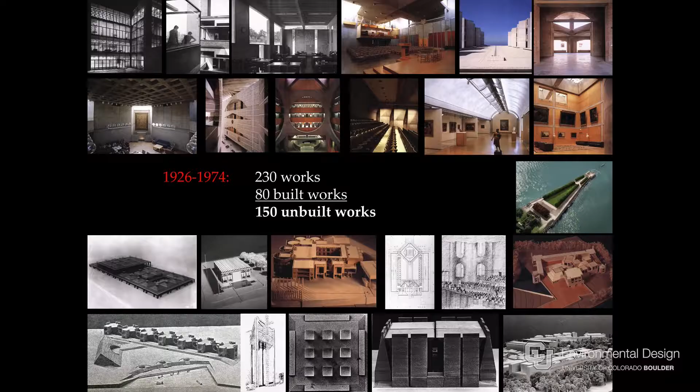Even so, the number of unrealized designs among Louis Kahn's total commissions is unusually high, 150 unbuilt projects out of 230 total designs. And the quality of the unbuilt work is simply staggering. I would maintain that if we were to leave aside Kahn's built works and evaluate only his unbuilt works, these would still constitute one of the most significant contributions to 20th century architecture.

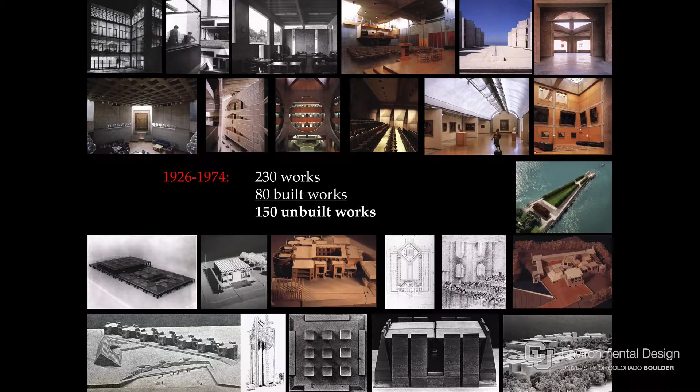As I was discussing with the students earlier today, architectural historians, critics, and practitioners have generally tended to ignore unbuilt designs by architects, being unwilling or unable to recognize either their theoretical insights, generative potential, or critical importance in an architect's development as a designer.

It is my contention that the loss of our disciplinary history that is represented by the failure of educators, practitioners, critics, and historians to study and learn from these transformative works, unrealized only by chance and circumstance, is intellectually and culturally unsustainable. The insights and constructive concepts embodied in unbuilt designs, such as Le Corbusier's Venice Hospital, must be re-engaged in the discipline of architecture.

As I mentioned in my comprehensive monograph on Kahn, I examined 12 major unbuilt works that I hold to be of equal importance as the 12 great built works that we all know. As becomes clear when examining Kahn's architectural designs in chronological order, it was almost invariably in these pivotal, but almost never studied, unbuilt projects that Kahn first evolved the fundamental ordering concepts that he would later use as the foundation for his famous and most often studied built works.

For Kahn, these unbuilt designs established the principles that would later characterize his built works, in the same way that the earliest archaic Greek temples are necessary for the realization of what we today consider the epitome of architecture of the period, the Parthenon. And about that, Kahn has to say, quote, "I do not believe that beauty can be deliberately created. Beauty evolves out of a will to be that has its first expression in the archaic. Compare Paestum to the Parthenon.

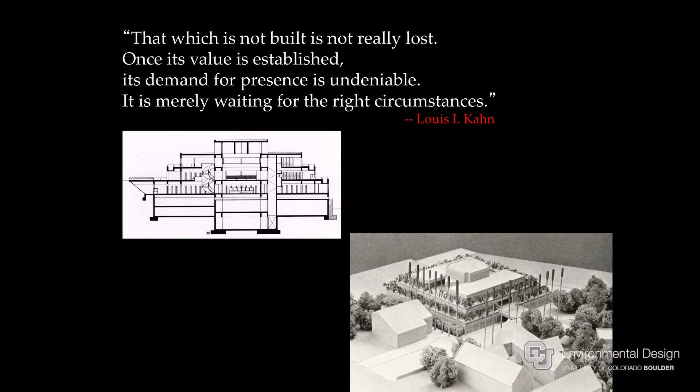In the brief presentation of these 12 designs, I'll indicate the ordering principles that Kahn discovered for each unrealized design, and where appropriate, point to his later built works where these ordering principles were in fact realized and engaged. We begin with the Jewish Community Center in Trenton, New Jersey of 1954 to 1958.

Kahn began the design of the main building by evolving a series of stacking and interlocking octagonal forms, even as the design of the bathhouse, which was the first to be built, developed as a cruciform plan of overlapping square volumes. In late 1955, Kahn presented the designs for the Trenton Jewish Community Center to two young faculty from the University of Texas, Austin: Colin Rowe, British architectural historian and critic trained by Rudolf Wittkower, and Robert Slutzky, American painter trained at Yale by Josef Albers.

These two young faculty told Kahn that it seemed he was trying to grow the building as an organic entity. And they suggested that, based on the overlapping grid of the bathhouse, Kahn should rather look at the plans of Andrea Palladio and what Kahn later called the bay system of room making.

And Kahn went on to develop the definitive scheme for the main building based on a tartan, or a small, large, small bay system that you can see on the left, with 10-foot square column clusters that house the service spaces surrounding 20-foot square primary functional spaces. And this can be understood as the first articulation of one of Kahn's most important concepts, which was the idea of servant and served space.

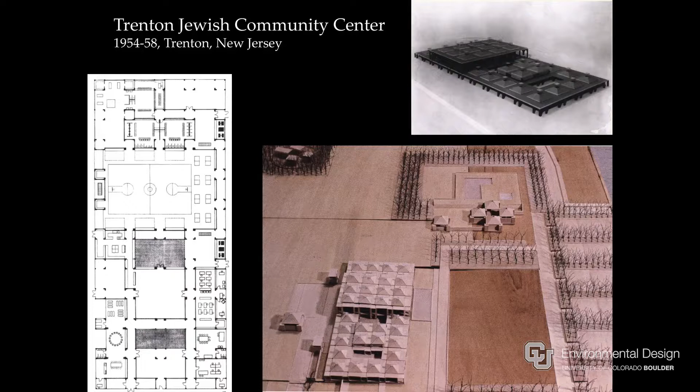By the way, the model on the lower right was made by graduate students at the University of Florida. I give these unbuilt projects by Kahn and Le Corbusier and others as studio projects, to assume they're built and then to make additions to them, as a way of studying them and treating them as possibly having been real.

In the bathhouse, the four hollow columns at the corners held the services and entries and were the first clear example of this conception of servant and served. In 1953, Kahn had anticipated the implications of this little bathhouse design when he said, "In Gothic times, architects built with solid stones. Now we build with hollow stones."

The community center and bathhouse's powerful definition of the space, of our experience of it, by the roof and the ceiling overhead, as Colin Rowe noted in his 1957 essay, Neoclassicism and Modern Architecture, went directly against the dominant definition of the free plan space of the modern movement, determined as it was by the flat slab and the column grid. Rowe noted that in his design, Kahn presents the most definitive solution to date for the desire to reintroduce overhead spatial structure, with spatial cells, structural bays, and horizontal structural system and rhythm, into modern architecture.

This intention of Kahn's, which would characterize all his subsequent designs, originated in the 1,760 up-view section axonometric diagrams of Auguste Choisy's Histoire de l'Architecture of 1899, the textbook that Kahn studied as a student and kept in his library and used in the office throughout his life. These drawings present architecture from throughout history as being focused on the formation of interior space through the fusing of the walls and the ceiling, the overhead surface as it generates the plan at the ground.

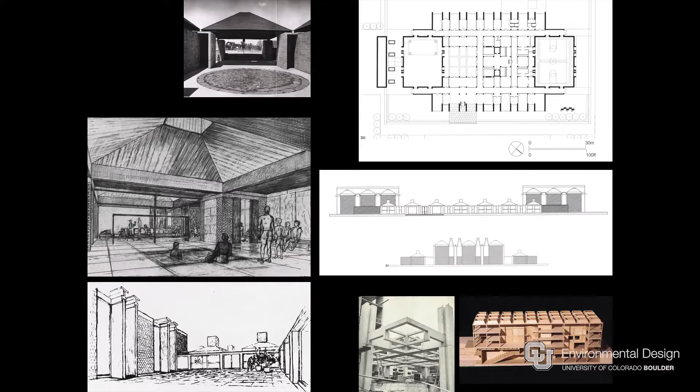Late in life, Kahn returned to this early concept of a field of pyramidal top-lit domes of the Trenton project in his design for the upper floor of the Yale Center for British Art of 1969 to 74, which was the last project that Kahn saw built. I mentioned this project to the students earlier today.

In the design for the United States Embassy in Angola of 1959 to 62, Kahn began with his observation regarding the way in which the inhabitants of the city of Luanda dealt with the intensely bright and hot sunlight. He noted that the residents turned away from the glare of the direct sunlight coming through the windows and worked with the indirect light that was bounced off the walls.

He also recognized the environmental intelligence of the traditional Angolan construction system that provided a ventilated space between the upper level top roof and the second rain roof, so as to allow the heat from the sunlight striking the roof to be exhausted and not taken into the interior of the building.

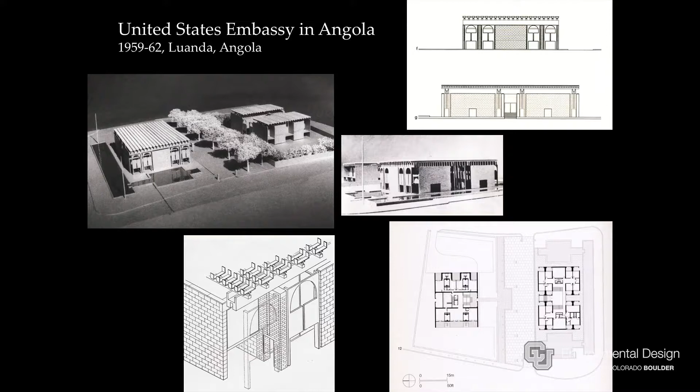Kahn's design for the embassy and residence for the ambassador involved a system of double layers of protection from the heat and the glare of the sun. A double roof of sunroof above rain roof, and double walls of precast concrete sun shields, he called them, surrounding glazed volumes within. These are Kent Larson's digital reconstructions, which I'll be using off and on throughout.

The porous tree-like shade canopy of the roof, constructed of bands of clay tile leaves, as he called them, with a narrow slot between, would have characterized the experience of the half of the interior volume that was actually open to the roof and open air in that case, with the diffused light punctured by thin lines of direct light only at noon.

Even more porous sun shield walls, articulated by semicircular openings at their top, stand 10 feet in front of the full-height glazed walls of the surrounding and enclosed spaces, through which the inhabitants would have been able to see both framed views of the landscape, as you can see in some of these reconstructions, as well as the play of light and shadow in the light court itself.

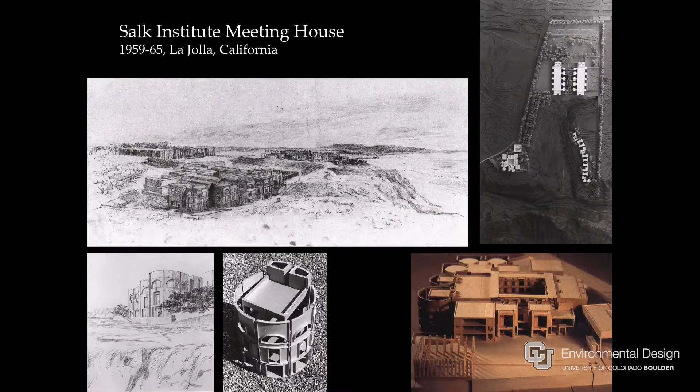The plan of the meeting house presents yet another new discovery for Kahn, the conception of a plan as an assembly of independent, self-structured volumes or buildings, rather loosely gathered around a square courtyard in this case. With its square regular center and irregular outer edge, the plan represents a new way of composing spaces for Kahn, one that allowed individual rooms to be read clearly while also establishing a sense of interior spatial structure ordered by the central courtyard.

A second conceptual discovery in this design is the way the independent room buildings are joined together with an extensive set of spaces for circulation and informal meeting, what Kahn called the architecture of connection, which is equal in dimension to the enclosed primary volumes. And that becomes a fairly typical thing for almost all of Kahn's later buildings.

Both these insights into plan making were at least partly inspired by the full-size imaginary reconstruction of the Campus Martius section of ancient Rome, the center of ancient Rome, made by Giambattista Piranesi in 1762, which Kahn hung on the wall of his personal office in Philadelphia, directly across from his desk.

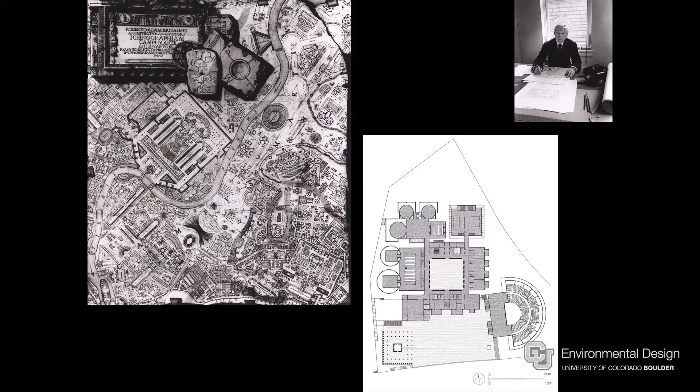So if you see Kahn at his desk, the photographer that took the photograph has his or her back to this Campus Martius full size, which is about the size you see on the screen actually. Piranesi's plan, which is composed of an endlessly varied set of clusters and assemblies of pure geometric forms, filled Kahn's field of vision whenever he looked up from his own drawings.

At the edge of the meeting house overlooking the Pacific Ocean, Kahn placed a series of cylindrical concrete sun shields housing cubic, full-height glazed reading rooms for the library, as well as a series of rectangular concrete sun shields housing cylindrical, full-height glazed dining rooms. The inner glazed rooms were to be given wooden shutters for control of the microclimate, and the outer sun shield walls were to be built of cast-in-place concrete with travertine stone insets, denoting the honorific status of these rooms.

From the courtyard open to the sky and centering in the building exactly like the Renaissance Palazzo, to the cylindrical glazed dining rooms that are set within their square outer shell walls, of which Kahn said there is no better seminar room than a dining room. The meeting house was organized to allow the scientists to engage larger issues outside of their laboratories. As Kahn said, quote, essentially Salk Institute is a laboratory building, but you must not forget that that place of meeting is of utmost importance.

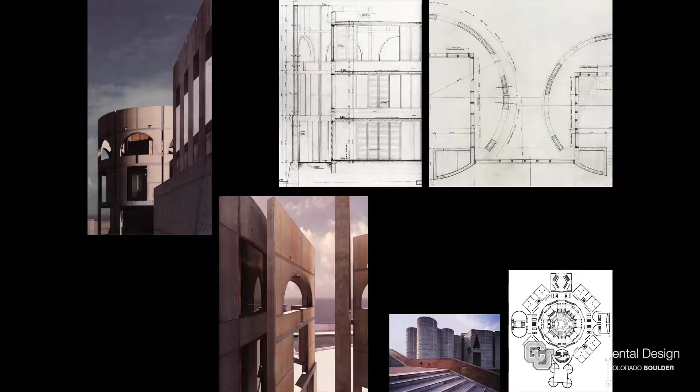The ordering of independent room buildings around a central honorifically dominant primary volume to form a regular center and irregular outer edge, the joining together of these independent volumes with the architecture of connections, and the concept of freestanding cast concrete sun shields forming shaded spaces, protecting glazed apertures within. All these concepts were developed for the meeting house and would later be realized in Kahn's assembly building of the Bangladesh National Capital at Dhaka of 1962-74, the lower right corner.

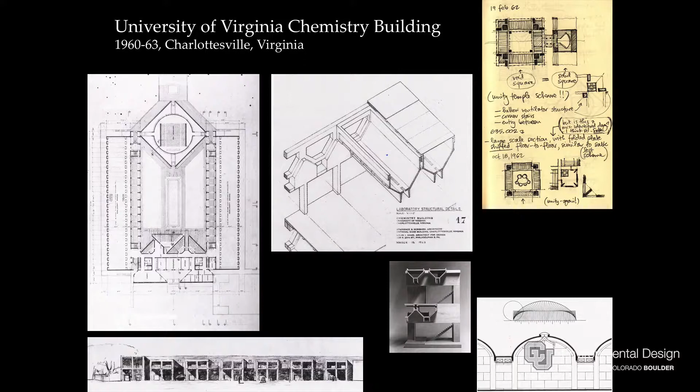This elegant folded plate structure, which was fully worked out for the Salk laboratories by Komendant, was abandoned after the decision was made to not build a meeting house. Kahn said he felt a terrible sense of loss when they could not employ this structural design at Salk, and he continued to endeavor to deploy it on subsequent projects, including the chemistry building. And it would ultimately evolve into the curved gull-wing-shaped cast concrete roof shell structure of the Kimbell Museum of 1966 to 72, the diagram on the lower right, where the initial idea of bringing light in at the center of the vault would also be realized.

Kahn's unbuilt designs for the Mikveh Israel Synagogue, intended to be built in his hometown of Philadelphia from 1961 to 72, which, according to his daughter Sue-Ann Kahn, was the project that hurt him the most in not getting built.

On the inner walls of the cylindrical light chambers, Kahn designed a series of arched openings with curves at the top and bottom, reversed arches that suggest the non-structural nature of those arches as well—the erosion of the concrete shells by light and the arc of the sun as it crosses the sky.

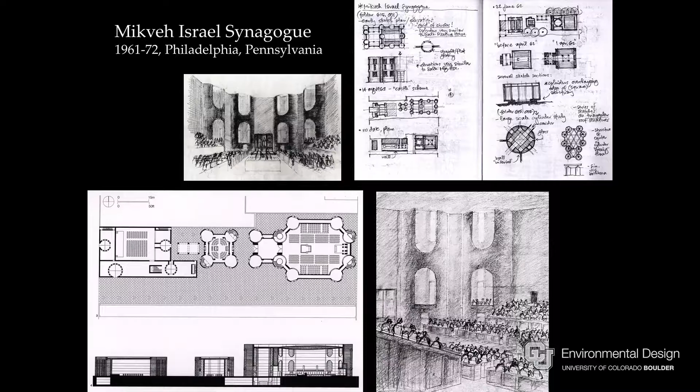The ceiling roof of Kahn's design proposed a structure that was elliptical in both plan and section, an internal hidden truss with top and bottom faces of cast concrete, very similar to Le Corbusier's Ronchamp Chapel, which Kahn had first visited in 1959. Contrary to almost all other religious structures, the ceiling comes down into the sacred space, catching the light from the cylindrical light chambers to the side, as you can see in Kent's reconstruction.

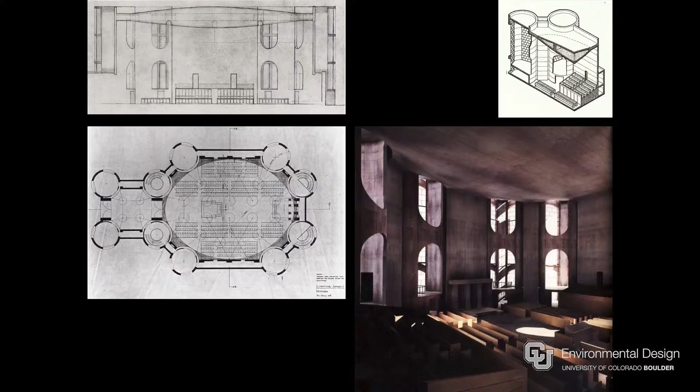These cylindrical light chambers are perhaps the best example of what Kahn called light-giving walls. Inside the synagogue, inhabitants would have had no eye-level views out, and sunlight would have been indirect and bounced off the curved walls, seeming to come from all sides, so that solar orientation would become confused. In this space, the inhabitants would be detached from their surroundings, distanced from the outside world, floating in a sea of light.

This is the image that was on the poster, I think.

Noguchi introduced Kahn to the use of plasticine clay, which Kahn immediately adopted for his site models. As a result, all of Kahn's later projects show a dramatically increased emphasis on the initial marking of the ground, on making an anchored base or plinth for the building, and on the engagement of the earth as the first act of construction.

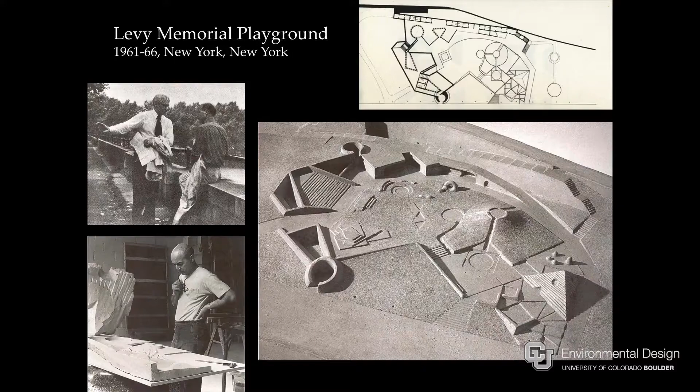In summarizing their six often frustrating years of collaborative work, when they were repeatedly blocked from realizing their designs by Robert Moses, the park and highway planner of the city, Kahn said: 'I did not speak in terms of architecture. He, Noguchi, did not speak in terms of sculpture. Both of us felt the building as a contour, not one contour, but an interplay of contours, so folding and harboring as to make, by such a desire, no claim to architecture, no claim to sculpture.'

These projects are waiting for the right circumstance. It's my understanding that Jonas Salk's son is currently fundraising to build this in New York in Riverside Park.

The Interama, Inter-American Community, designed in 1963 to 69 for Miami, Florida, was part of a large exposition site involving buildings by many of the leading architects in the US. I.M. Pei and Marcel Breuer were quite close by Kahn's project.

Kahn's proposal was for a powerful series of independent building volumes that framed a triangular plaza with views across the bay to downtown Miami. A line of what he called houses of nations, whose Y-shaped plans housed naturally ventilated exhibition and cultural spaces, marched along the western side of the site, forming small courtyards at the water's edge.

The main building at the southern end of the site, with the central sunken court and pinwheeling stairs, employed servant and served spaces in both plan and section, shown upper right.

Of particular note are the X-shaped structural beams that you can see in the section that encircle the top of the main space, which in addition to carrying the roof and housing ventilation ducts, also act to bounce the sunlight into the central room.

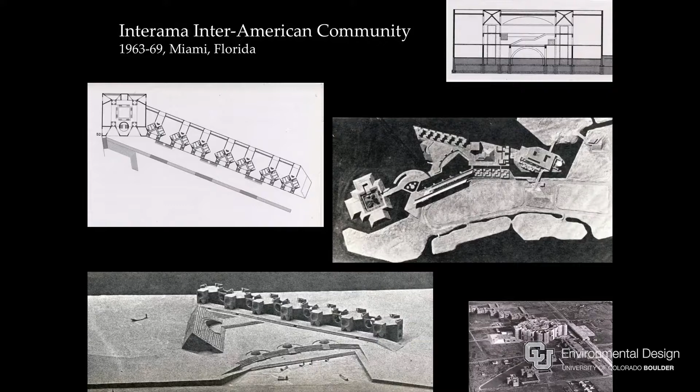The Dominican Motherhouse was designed for Media, Pennsylvania in 1965 to 69, and is a recomposition and transformation of both the traditional program and building type of the convent.

As can be seen in the Salk Institute and the Indian Institute of Management, Kahn believed that the monastic plan was an appropriate type for use in housing many other programs. But this was his first chance to design an actual monastic enclave.

In an early drawing, shown lower right, after developing his typical series of independent room buildings, Kahn took the logical next step in this way of making plans, which was to cut them apart with scissors so as to be able to freely rearrange them as a collage.

The resulting plan has a regular outer edge formed by the walls of the cells of the sisters, as you can see in the upper right, and an irregular center where Kahn has placed the common rooms such as chapel, refectory, library, and schoolrooms in what would, in a traditional convent, have been the open courtyard.

The result is a reversal of his own plan for the Salk Institute Meeting House with its irregular outer edge and regular center. It is also an inversion of the traditional plan of the monastic type.

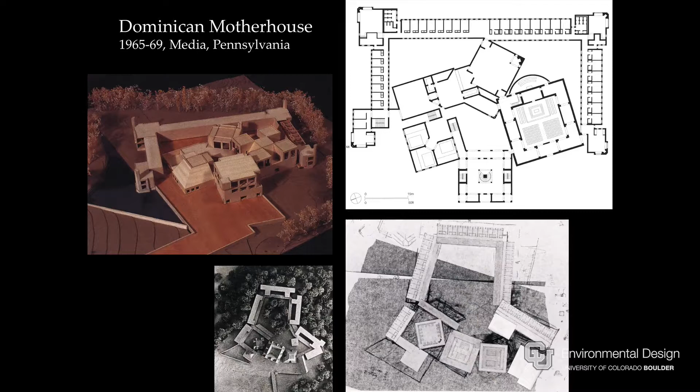Kahn proposed the Dominican Motherhouse to be built with masonry bearing wall construction using flat jack arches over the windows and door openings.

These are redrawn elevations done by my students, with openings becoming larger and piers becoming smaller as it rises, to reflect the diminishment of the structural loads.

This method of constructing statically hierarchical load-bearing walls that represent the diminishment or increase of their load would be realized in Kahn's design for Exeter Library, lower right, of 1965 to 72, while the conception of a plan as a collision of independent pure volumes would be realized in Kahn's Fisher House of 1967, the photo next to it on lower right.

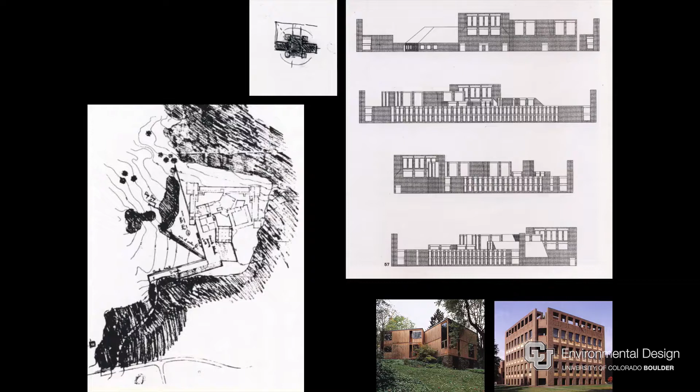The Kansas City office tower of 1966 to 74 was one of Kahn's very few attempts to come to terms with the dominant building type of his time, the high-rise office tower.

Kahn felt that typical steel frame high-rise construction was not substantial enough, calling the buildings of Mies van der Rohe and SOM tin can construction.

For Kansas City, Kahn and Komendant proposed to build a 24-story tower using slip-form concrete construction, which would have been less expensive and required less time to build than steel construction.

Four corner double columns would have supported a post-tensioned truss structure at the roof, and the building would have been constructed from the top down with reusable formwork slipping down, as you see in Kahn's drawing of the actual construction process.

Of particular note was Kahn's provision of smaller scale spaces at the street edges to mitigate the large scale of the tower in the city.

In 1974, SOM convinced the client to give them the project. Kahn, who was not informed of this decision for some time, continued to work on the design.

For Kahn, this episode exemplified, as he told Stanley Tigerman, the last person to see him alive, in London, what is wrong with our profession: no ethics. And he was a close personal friend of Nat Owings.

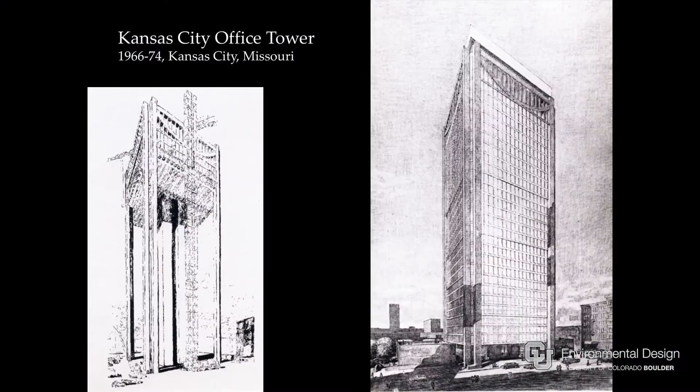Kahn's sketch for the drawing of the top of the Kansas City office tower, at the lower right, showing people on the rooftop terrace above the curving catenary roof truss, was transferred to his later Palazzo dei Congressi project, which we'll see in a minute.

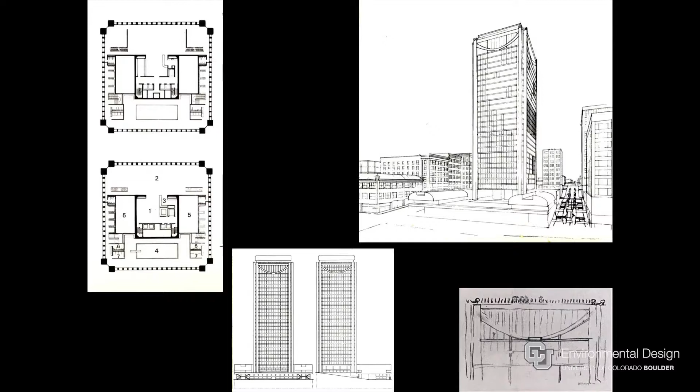His concept of building a tower from the top down and hanging the floors of an office building would inspire a number of other architects, to name only one, the design of Norman Foster for the Hong Kong-Shanghai Bank.

The memorial to 6 million Jewish martyrs, to be built in New York at the tip of the island, 1966 to 72, in the original Battery Park, proposed a series of glass cubes 10 feet on a side, which would transmit light while also casting light-filled shadows. Kahn intended to build a memorial using a woven structure of 6-inch by 6-inch by 6-foot long cast glass blocks,

Which would have been cloudy and finished with a non-reflective surface. So the plexiglass that he used to make the models is quite accurate in that sense. The glass blocks would have been assembled without mortar, using interlocking pin and hole jointing, like the marble sections of a column of a Greek temple.

In describing the quality of light he intended for the project, Kahn described the experience of the Pantheon in Rome. Quote, "The light is so strong as to feel its cut." End quote. In this, Kahn seemed to suggest that he conceived of the cast glass as a frozen or solidified light, which had been cut and shaped into masonry blocks. The whole design is a monument to light, massive, thick, translucent light.

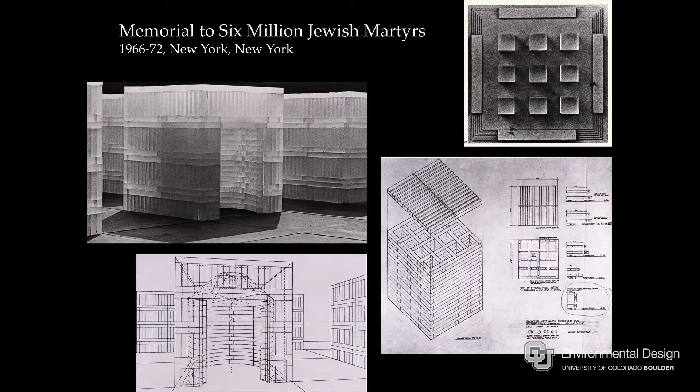One of Kahn's greatest unrealized projects is the design for the Hurva Synagogue, proposed to be built in Jerusalem and worked on from 1967 to 74, 74 being the year of his death. Sited on the hill opposite the Temple Mount, Kahn carefully kept the height of the building no more than the two great religious sites of Islam, the Dome of the Rock, and of Christianity, the Church of the Holy Sepulchre, which stand atop the Temple Mount.

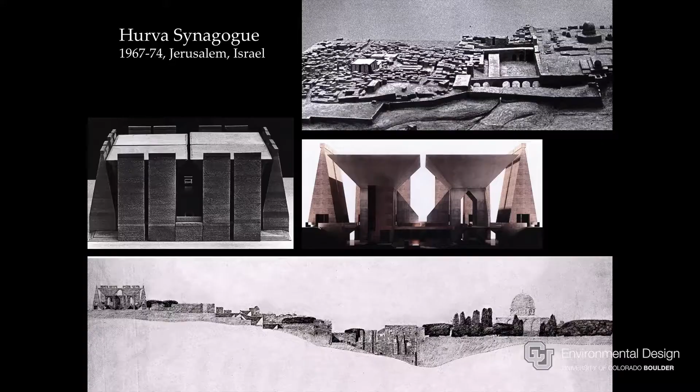Kahn painstakingly made a large site plan, site section, and clay model of the entire central section of ancient Jerusalem to assure his design was appropriate to the larger context. The design is remarkably introverted.

The outer wall is composed of 16 massive pylons made of Jerusalem stone, the same stones that are used to build the western wall of the Temple Mount, off of which the sunlight would have bounced to enter the sanctuary within, giving it a golden glow. One would have entered the synagogue at the corners between these battered pylons, remarkably similar to those on Egyptian temples, and these pylons housed small chapels at their bases, small so-called candle chapels.

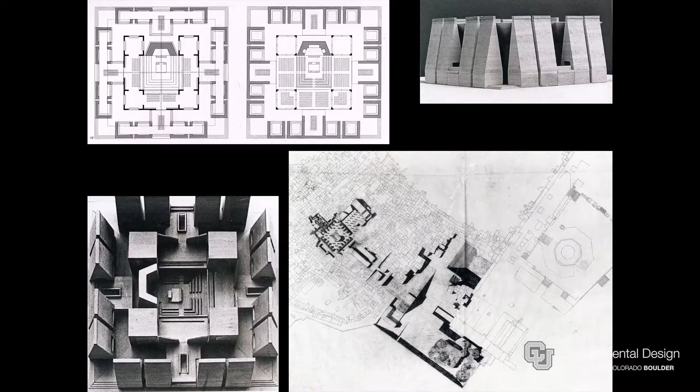Inside, 4 massive concrete umbrella-like roof structures, hollow, lightless, and dark, define but do not enclose the space of the sanctuary, its square and cruciform plan. The 4 umbrella-like roof structures would not have touched, and light would have entered the sanctuary through the thin slots between the edges of the beveled concrete and the roof shells.

It's pretty compelling. The structure joins modern reinforced hollow concrete construction to ancient battered wall masonry mass and brings to mind Kahn's debt to Le Corbusier and the remarkably prescient statement that Kahn wrote in 1965, shortly before he learned of Le Corbusier's death that same year, which is as much about Kahn's own architecture, I would argue, as about anything Le Corbusier might design.

Quote, "The stark architectural directness of the castle and the musically rhythmic image of the Greek temple combines in my mind a thought about Le Corbusier. I believe Le Corbusier, even in light of his marvelous revelations in architecture, is just beginning to make his greatest work. I dare to think of a building he might make, a great block of a building, which is cut into from top to bottom in varied places of varied shapes, neither forgetting the castle nor the order of the temple, giving light to spaces and passages on the immediate interior and leading to a glorious central and single space, the walls and their light left in faceted planes, the shapes the record of their making, intermingled with the serenity of light from above," end quote.

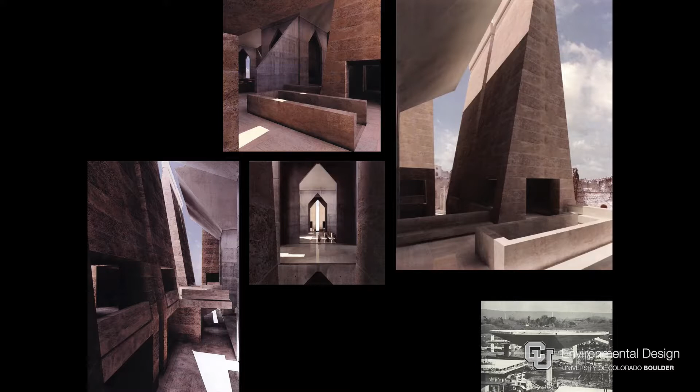I have to say, there are few statements by one architect of another architect's work of that kind of poetic power. At the time of Kahn's death in 1974, Jerusalem Mayor Teddy Kollek had just written to Kahn of his eagerness to start the building of the Hurva Synagogue.

The concept of the umbrella-like concrete roof shells, an idea that Kahn had been interested in since he visited Wright's Johnson Wax Building in 1959, which was built in 1936, but which he only visited in '59, were realized in a very different form in the Olivetti Underwood factory, lower right, of 1966 to 70, on which the young Italian architect Renzo Piano worked with Kahn. Piano, at the time I wrote this, was designing the addition to the Kimbell Museum, which is another discussion altogether.

The Palazzo dei Congressi, designed for Venice, Italy, in 1968 to 74, began with Kahn's clay site model of the city of Venice, upper right, with only 3 monuments that are clearly legible: the Piazza San Marco, Le Corbusier's Venice Hospital, which at that time was still intended to be built and was under development by his partners, and Kahn's Palazzo dei Congressi on the original site he was offered, the Biennale Giardini site, where the biennales are held. In the heavily treed Giardini site, Kahn proposed an elevated Congress Hall and an artist's workshop on the ground. Plan on the lower right.

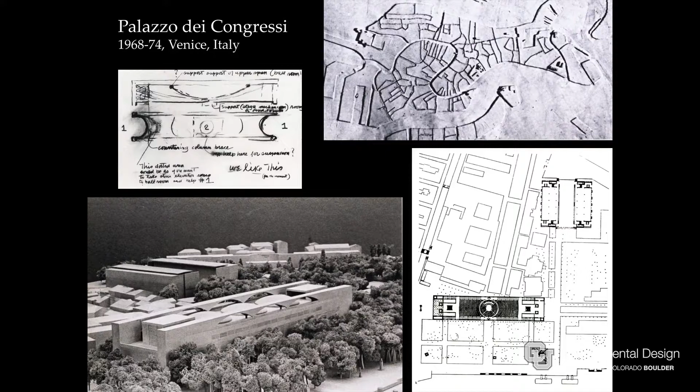The curving floor of the elevated Congress Hall was inspired by Kahn's studies in 1950 of the bowl-shaped Campo in Siena, as well as suggesting a large bridge hanging down rather than rising up as those in Venice. The floor structure of the Congress Hall was to be a post-tensioned cast concrete slab in the form of a catenary curve, almost exactly as he first proposed in his sketches for the top of the Kansas City office tower.

Italy being Italy, the Biennale Giardini site proposed by the city was then rejected by the city. And the city asked Kahn to redesign the Palazzo dei Congressi for a site in the city-owned Arsenale, at that point not being used by the Biennale as it is now, the former shipbuilding precinct of the Venetian Empire. Here Kahn was able to propose that the Palazzo dei Congressi span across the canal, giving the conception of the suspended Congress Hall a much clearer rationale.

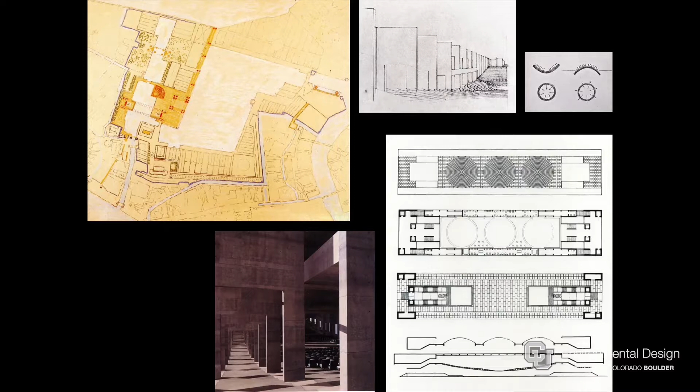On the roof of the building, above the 3 smaller domes, Kahn proposed an elevated garden and a viewing terrace. Together, the interior of the Congress Hall, understood as a kind of piazza bridge, and the roof terrace engaged Kahn's friend Aldo van Eyck's insight, in that little diagram in the upper right, that when people occupy hilltops, they face outwards to the distant view, as on the top of the building. And when they occupy valleys, such as the curving Congress Hall, they face inwards towards each other and are gathered together into the space.

During the time Kahn worked on the Palazzo dei Congressi, he was invited to give a lecture on the roof of the Doge's palace. We should all be so lucky. There he was able to observe at close hand the lead roofing of San Marco Basilica. Noting that this roof had lasted 1,000 years on these curving forms, Kahn said he felt it was certainly appropriate for use in a contemporary building. And based on his notes as to the sheet sizes and installation methods, Kahn used the same material and methods of installation on the curving roof of his Kimbell Museum, lead-coated copper in this case.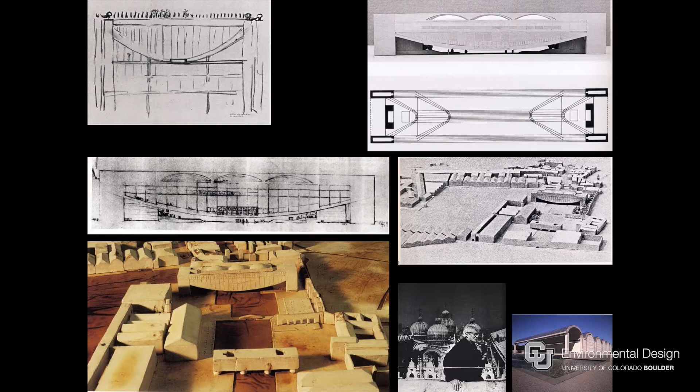The Palazzo dei Congressi was also the first late design where Kahn proposed, rather than deeply recessing the glazing, a flush glazed facade and stainless steel skin, both of which he would later employ on the Yale Center for British Art.

Okay. The design for the Graduate Theological Union Library in Berkeley, California of 1971 to 74 was intended to house, and in fact today does house, the world's largest collection of books on religion. In many ways it is a return to Kahn's 1956 unsuccessful competition design for the Washington University Library, which was a pyramid of books proposed at Washington University as glass, but here proposed in concrete, a pyramid for books, but in this case also housing an Exeter library-like central vertical space that you can see in the section.

Kahn proposed here for the first time that the apertures of the building would be shaded by rows of trees, what he called a green filter, that incorporates a garden into the building fabric. This late design had only reached a very preliminary stage when Kahn died, and the building was later realized in a significantly modified form, photo in the lower left, by local architects from 1977 to 87.

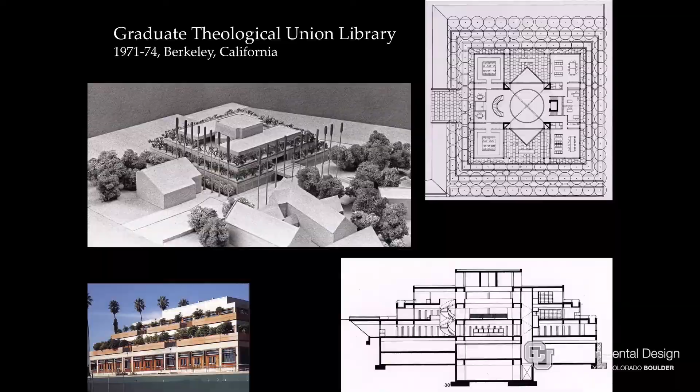While the resulting building follows Kahn's design in general massing, almost none of his specific ideas from the preliminary design were actually employed. The result may best be described as a bit of a caricature of Kahn's design. While in my monograph on Kahn, published in 2005, I said the library, even in its modified form, should be considered Kahn's last built work, having recently revisited the building, I have now come to the opposite conclusion and feel it's best that Kahn's unbuilt designs remain so, unless they can be realized as closely as possible to how he left them.

Which brings me to the last project. The Franklin Delano Roosevelt Memorial, proposed for the southern point of Roosevelt Island in the East River of New York in 1973 and 74. His site is within view of the United Nations buildings, as you can see in his sketch. And this project represented a return to beginnings for Kahn, who had begun his career as a housing architect for Roosevelt's New Deal, designing more than 2,500 housing and government-sponsored apartments by the year 1945. As the client noted in hiring Kahn, quote, "Kahn loved Roosevelt and knew more about him than most of us."

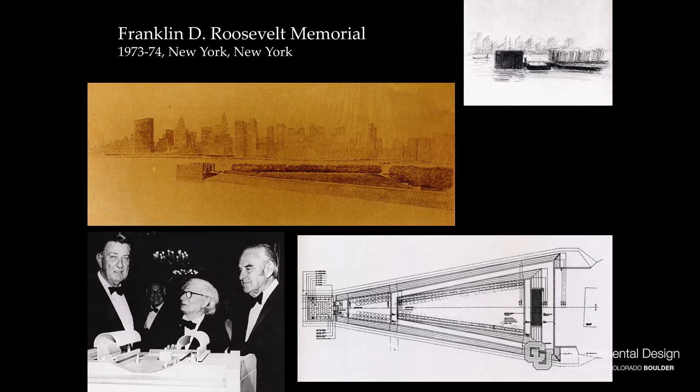Kahn's conception of this memorial came early and clearly, quote, "I had this thought that a memorial should be a room and a garden. The garden is somehow a personal nature, a personal kind of control of nature, a gathering together of nature, and the room is the beginning of architecture," end quote. The site is entered from the north end, where we would move through a long, downward sloping perspectival garden, appearing longer than it is in fact.

At the other end is a roofless room, set out into the river, made of massive stones opening to the south. Kahn proposed, actually, in his models, you can see them here, two statues of Roosevelt. A life-size standing figure we would encounter outside the stone room, and a larger than life-size figure of Roosevelt sitting in a wheelchair we would encounter upon entering the stone room on the inside and opposite side. The 60-foot square room is a truly archaic space with 12-foot tall walls that are 6 feet thick, made of solid granite blocks. The room is at once both monumental, scaled to the city, and intimate, scaled to the human figure standing at the center of the river.

So I end the lecture with three endings. The first is the last words in my book, written in 2003, published 2005, on Kahn. After Kahn's death in 1974, the Roosevelt Memorial design, like all of Kahn's unbuilt projects, was abandoned. Recent events, however, hold out some hope that perhaps this extraordinary design of Kahn's may yet be built. Second ending, written in 2009. Yet Kahn's design of the room and the garden was completed through construction documents, ready to be built, and fundraising efforts continued for more than a decade. In the 1980s, the basic work of grading the island point was accomplished, under the supervision of Romaldo Giurgola, before the funding was exhausted.

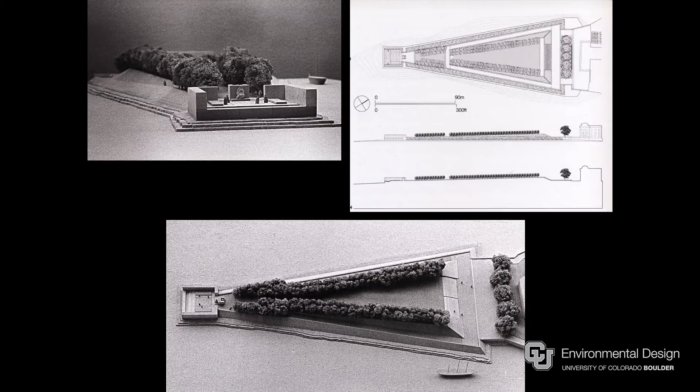Then, this is in 2009, construction began in earnest on the memorial, with test trees being planted on the edges of the island and the foundations of the room being cast. And again, written in 2009, the memorial is expected to be completed in the next several years, beginning with the room. And then the most recent time I've given this lecture was in 2012, and it was on the same day as the opening ceremony, to which I was invited by the Kahn family. Pouring rain in October, rain from the side, and I gave the lecture still drenched from the rain.

And I have to say that my experience of this is that it's a miracle. This is a miracle. It's built so well. So what Kahn would say, of course, about this miracle, is that the design's demand for presence is undeniable. It was merely waiting for the right circumstances.